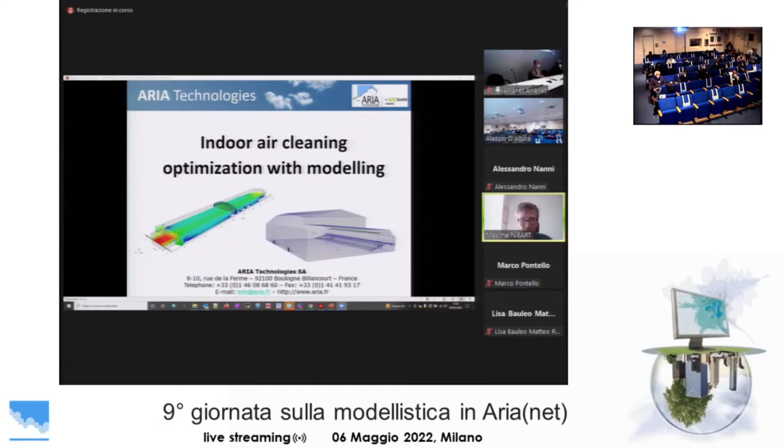I'm pretty sure you have seen the increasing interest in depollution systems. That's basically a filter system that takes part of the pollution from the air. It is often the case that this depollution system is easier to do indoor than outdoor, mainly because outdoor you have to face the big power of the atmosphere that brings again and again a large amount of momentum and a large amount of pollution.

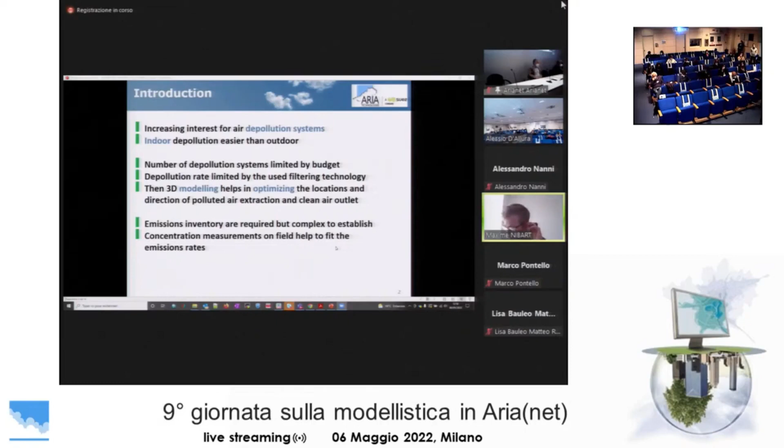When you have a project where you can bring a depollution system, there are some constraints. First, budget constraint - you cannot bring a lot of depollution systems because it can be costly. It can have too large power consumption, and also this kind of system may have limitation in terms of filtering effect. The filtering is not perfect, so there is some ratio of the pollution that can be filtered.

With this constraint, the modeling can help to design where to put the different systems in the indoor area.

One of the things that is important, in the two projects I will present, is that there is local emission, so you need to build an emission inventory also indoors, which is something not well known, with no standard procedure as in the outdoor field. So you have to find ideas on how to build your emission inventory.

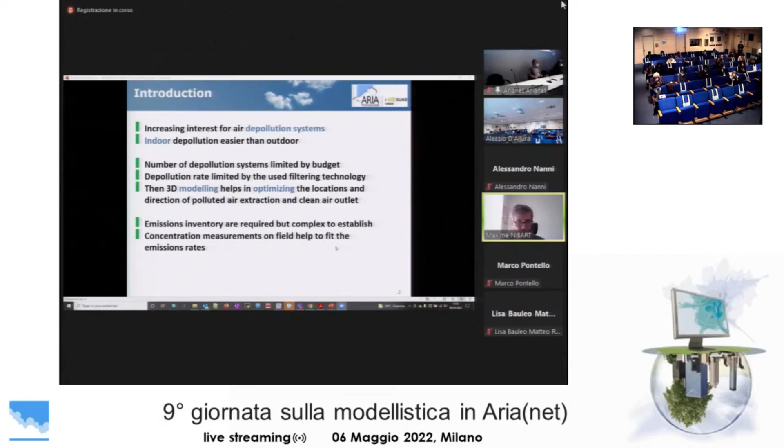For the moment, what we have done is some measurements on site to help fit the emission rates, because there is a lack of knowledge in terms of emission rates and emission factors.

That's the first case - this is a case in the subway of Paris. The project name was IP'AIR, a project from Suez. We have been involved for modeling before the depollution system was set up, and also after, to do some validation.

The idea of the modeling was to help design, but there was a lot of constraint, so the help of modeling was a bit limited. But the idea was also to learn a lot about what we can do and how to set up a model for next time, when Suez will be in position to add the depollution system in other subway stations.

There have been 2 field campaigns with mobile sensors, small sensors, done by Suez, and also the RATP, which is the administration managing the subways in Paris, has set up one reference sensor that you can see in the picture here. The air is entering somewhere here to catch the particles inside the system.

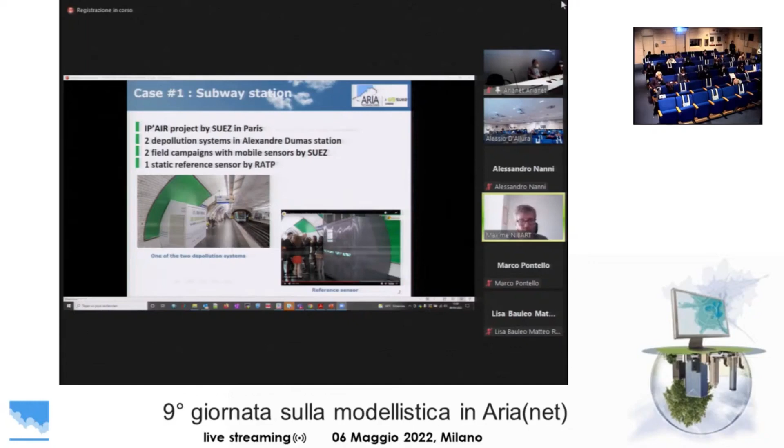On this picture, you see one of the two depollution systems that have been installed here. This is maybe the inlet, and there should be an outlet on the other side. Here we focus mainly on PM.

Suez have done two measurements with a small sensor at different positions in the station, to have an idea of what concentration is coming into the station from the different openings, such as the stairs or the train tunnels, and also to see if there is any significant spatial variability in the station.

Velocity has been measured also at the entrance, at the different entrances and outlets of the station, and also, as we need some information about mixing, some turbulence measurements have also been done.

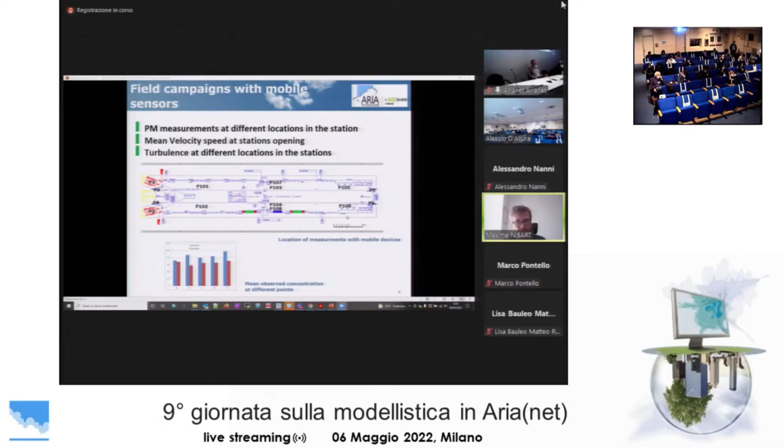In terms of what have been done, we set up a CFD model. In ARIA, we often use the Code_Saturne model, which is developed by EDF.

What is important to have in mind is we want something quite simple, even if it's 3D. In real life, the dispersion and what is happening in such a station is fully unsteady and very complex, and we don't want to go in that very complex direction - we want something quite simple.

So the idea is to make the hypotheses needed to find something compatible with a steady state. That means essentially we have modeled the effect of the movement of the train and the movement of people as a turbulence source inside the domain.

Everything is also quite complex in terms of concentration that can enter into the model, so we have mainly used measurements rather than using an analytical value from literature.

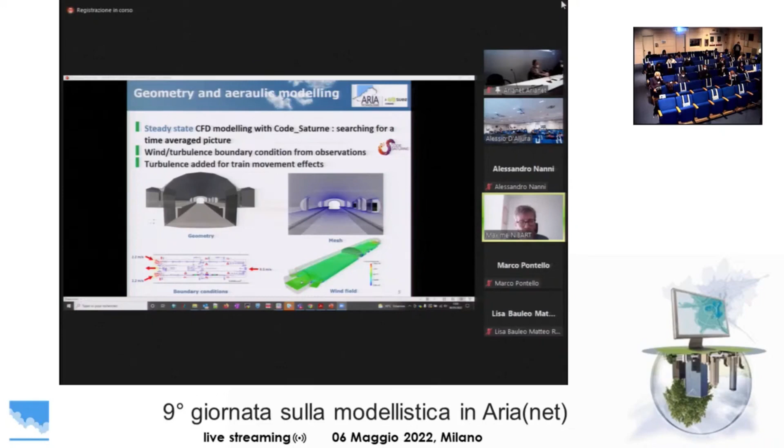And we have set up concentration incoming by the stairs and by the tunnels. And also we have added some emission inside the domain, but it's really difficult to estimate these emission rates, so we have mainly fitted them according to observation.

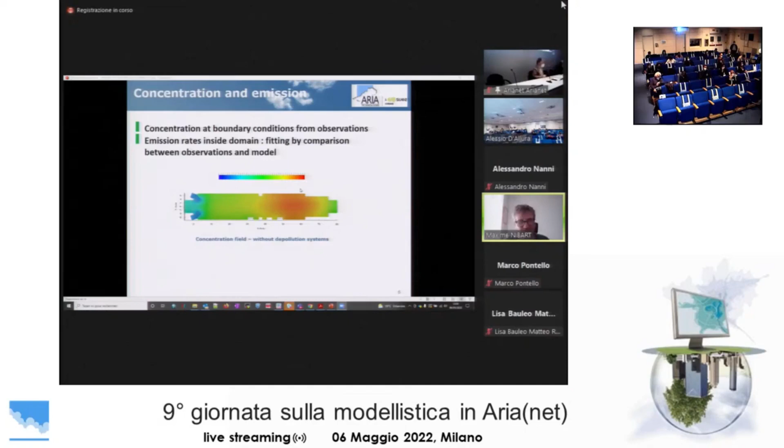So at the end, we have that kind of map. You see that I have hidden the value. Part of the result of this project are confidential, so I cannot give you all the details. So I hope you won't ask too detailed questions after the presentation. Maybe I'll just say I can't tell you because it's confidential.

So the result of this first case has been used a bit to choose where to put the module, and also to choose in which direction we should get inlet and outlet air.

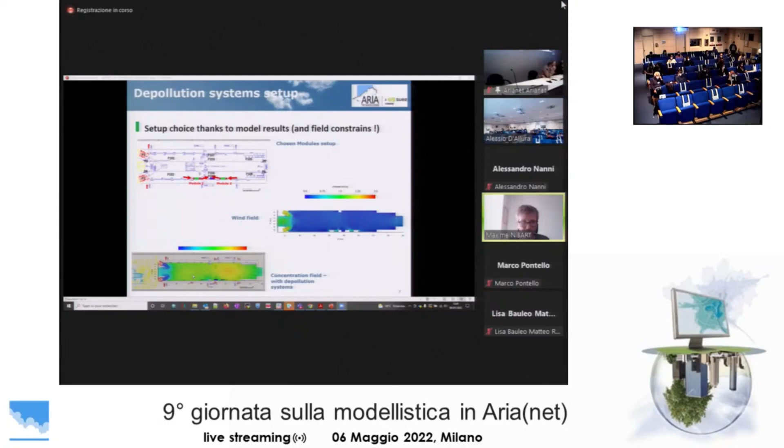And at the end, after a campaign done once the modules were installed, we have done some comparison between the observation and the modeling. And even if the tendency is not perfect, it seems that we have succeeded in setting up a methodology.

It's not only modeling; it's a full methodology, to get something that is not so far from the observation. And now we know that we could use this method for other stations, maybe more complex stations with a larger number of entrances and so on.

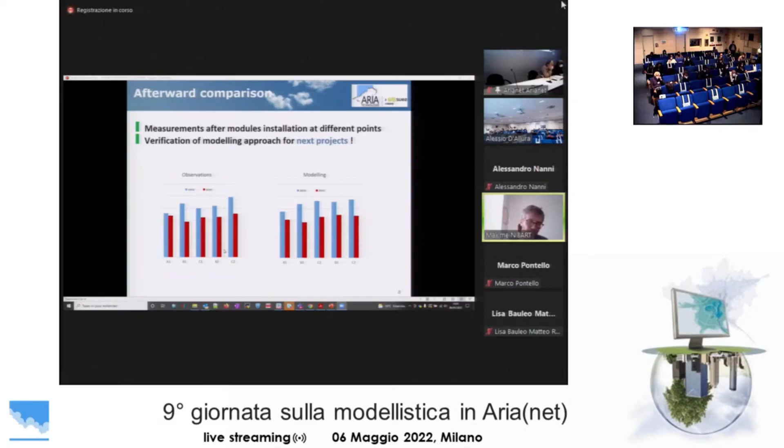So here we are in a gymnasium. Again, it's a project by SUEZ. And actually, I wasn't aware of that, but maybe 50% of sport gymnasiums have no ventilation system. So if there is some ventilation system, you just have to plug in, add a filter to have better air quality. But if there is no ventilation system, it makes sense to add something to do depollution.

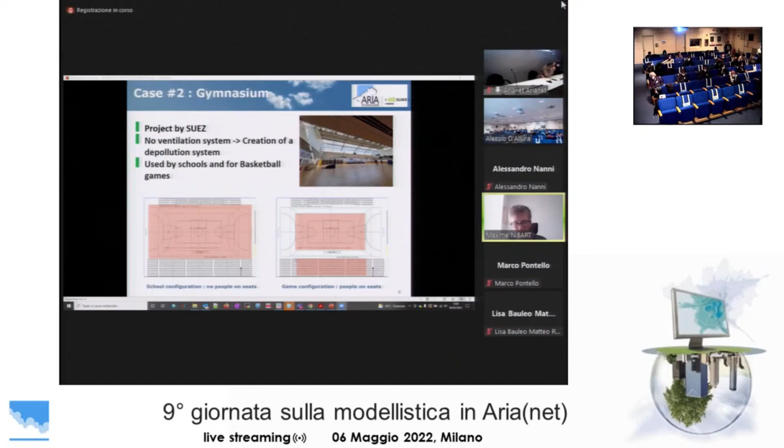So in the project, we focused on a gymnasium where there is some school using it on a large area, and there are also some basketball games. So here you may have sources, people, players in a smaller area, but a big amount of sources of people on the seats.

So we have done the same kind of modeling with the code Saturne, the geometry and the mesh. In terms of aeraulics, we don't consider any thermal effect. So the aeraulics is mainly driven by the depollution system, and we have tested different extraction outlet configurations as you see there.

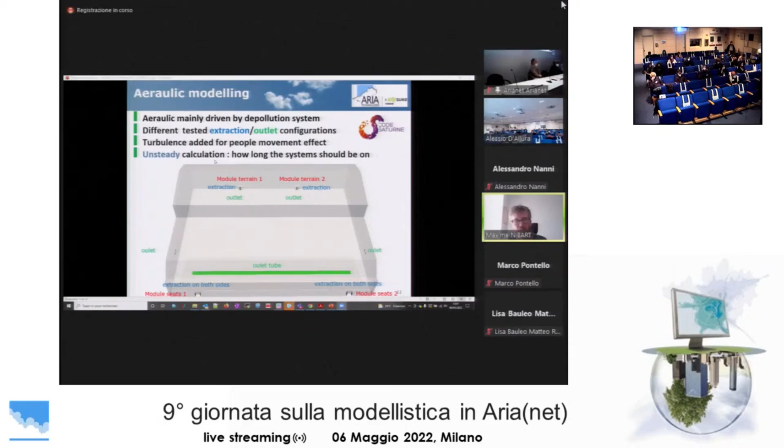Here we are looking at unsteady flow, because one of the questions is about time. One of the questions is how long should we use the system before the air is clean, or during a basketball game, can we avoid significant increase of the pollution?

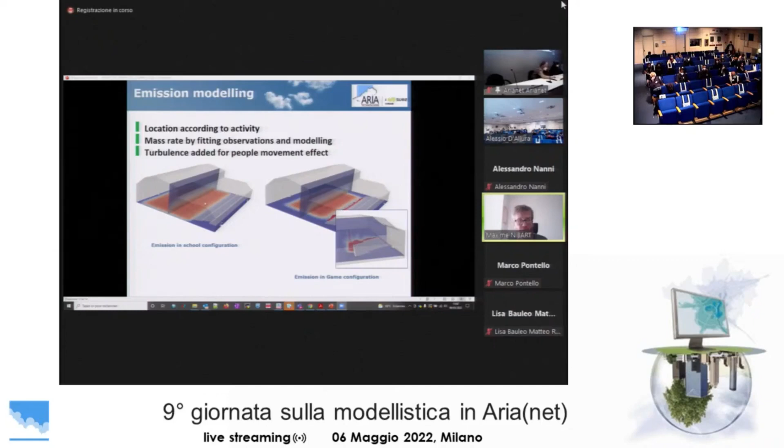So we have put some emission on the ground and also potentially on the seats, as you see here. We have added turbulence to consider the effects of people's movement. And then we have run the 3 configurations.

So you see that we have tested different configurations for the aeraulics. Here you see that there is a difference in terms of where we focus the clean air. And also here there was the idea to have not a small plane, but a long tube where there is clean air outflow.

And here you see a picture at a given slice of the velocity field, and here you have some animation. So for the school, the idea was to look at how much time we need to have clean air after the kids are out.

So if I switch on the animation, you see that it's a calculation of several hours. And here, these 2 cases are only 2 hours. The idea is during a match, during a game, do we succeed in limiting the increase of pollution?

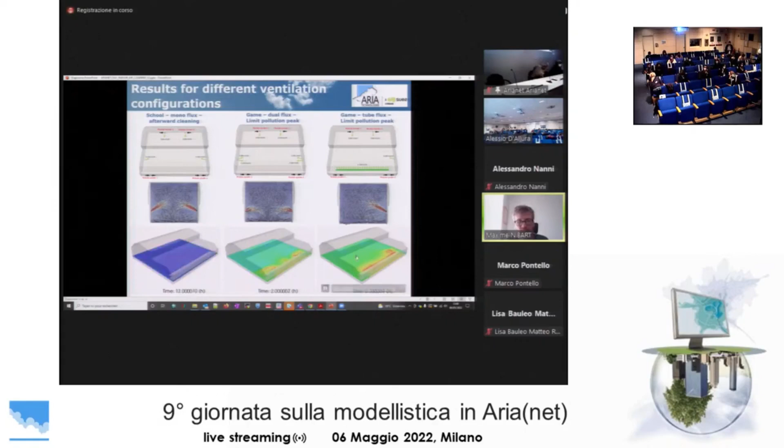And I'm done. So thanks for your attention. Do you have any question?